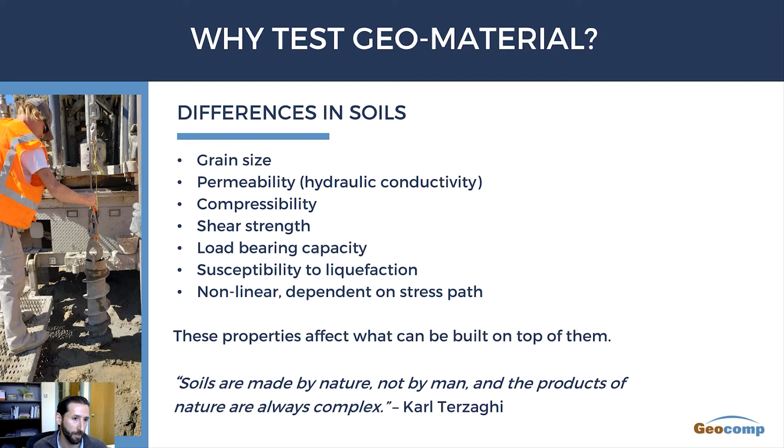I'm going to run through a few common examples here that you may be familiar with and what types of tests we deal with through some of these. But first is our first question - as I mentioned, we're going to quiz you a little throughout here.

What's one difference in soils that makes lab testing important? We just kind of ran through this. Is it shear strength? Is it the color? Or is it the soil location? Click your answers in there.

Give everybody a quick chance to vote. As I mentioned, we're trying to keep these easy and lighthearted - everybody gets a PDH.

Okay, so the right answer was shear strength, and it looks like pretty much everybody got that correct.

Okay, so the types of tests - I want to talk a little bit about these, and then we'll get into the application of them. We like to break this into about 4 general categories of testing: consolidation, strength, permeability, and cyclic and dynamic testing.

Consolidation testing has several variations - 1D incremental, constant rate, Rowe consolidation, or hydraulic consolidation. These tests are mainly performed for settlement analysis, and that comes into play with designing foundations, slabs, and many other types of structures. We're trying to get a sense of how the soils are going to settle - is it going to be differential? How do we have to design this structure to account for that?

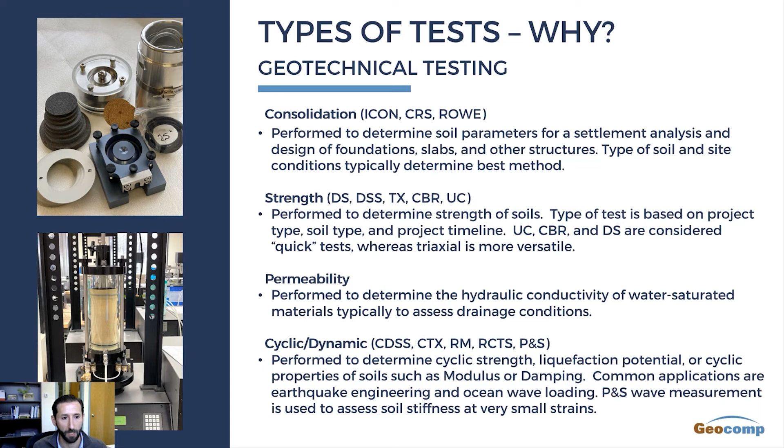So we'll take a look at a few examples here. First one being a deep excavation. Now this was a project in New York City, and it's kind of an example of this.

So testing needs to be done for a variety of reasons. It might be done for the temporary condition of the excavation - how many supports do we need to put in here? Maybe it's a water management plan during construction, and or possibly for the final condition when the structure is going to be built on top in the foundation.

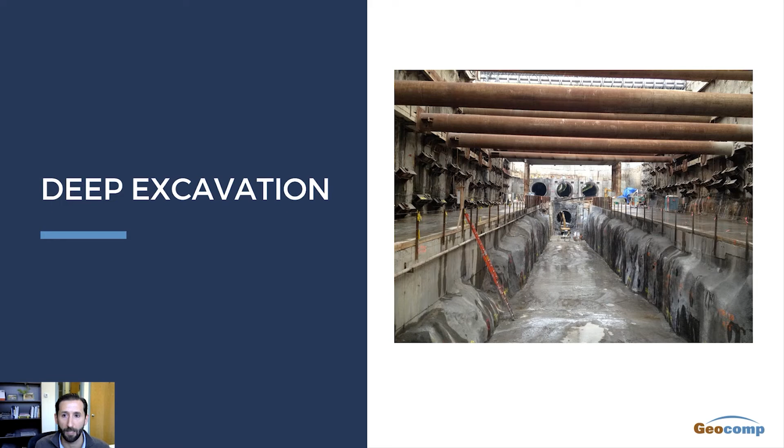So the soil here is going to be tested, probably for triaxial, direct shear, and consolidation. The types of triaxial you consider are mainly going to be for slope stability design throughout the excavation and construction. I'll draw on the next slide to give you a better sense of that, but that's going to allow them to design and get a design scheme based on these horizontal and vertical pressures that are going to be felt by the foundation. So this is key to get lab testing and see how things are going to behave.

But just considering the earthen dam in general, the properties of the soil need to be known so that the slope design, the angle, will support the pressure of the water, prevent harmful seepage. So internally, we need to make sure water's not seeping through the structure, and overall to prevent collapse or catastrophic failure.

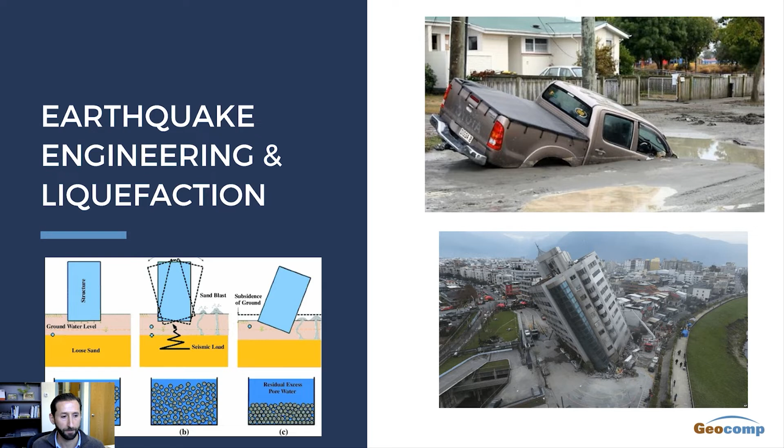Okay, that leads us into question 2.

So what is one popular soil strength test that has value for a variety of applications? A key here being soil strength test. As I mentioned those categories earlier - is it consolidation? Is it triaxial? Or is it dirt curls? I'll give you a hint: it is not dirt curls.

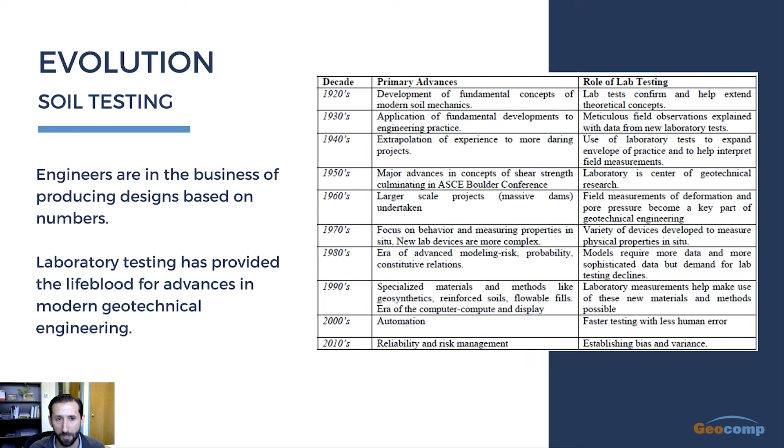Now I'm going to kick it over to Brian Thomas, who's got a great bit of experience working with both manual and automated testing systems. Thanks, Brian, for getting a little more in depth on why we need to perform the various geotechnical tests, and for that brief history lesson.

These tests would run over the span of many days and many nights, meaning that the lab technician would have to stay through the night in order to get the data that the test was producing.

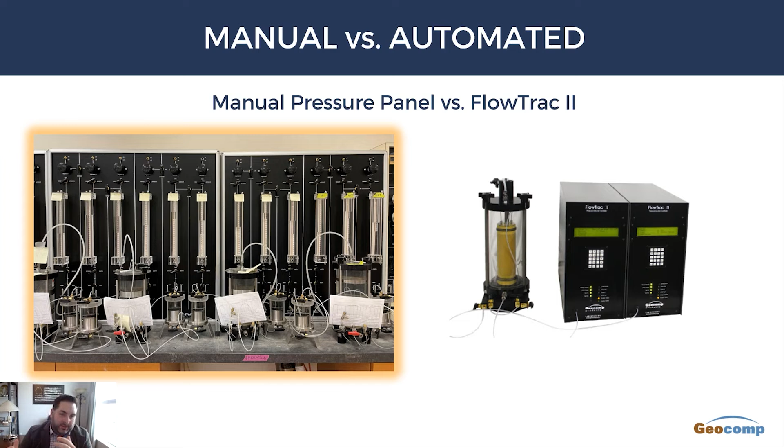If you missed one of your readings, you basically had to go back and guess. Many current and former lab techs remember setting alarm clocks and sleeping on cots in the lab. That was the dark ages, before the adaptation of automated testing. This is really one of the reasons why automated testing was invented to begin with—we can now improve the quality of testing while lessening the strain on our staff. With a fully automated system, there's no more sleeping on cots, no more all-night shifts.

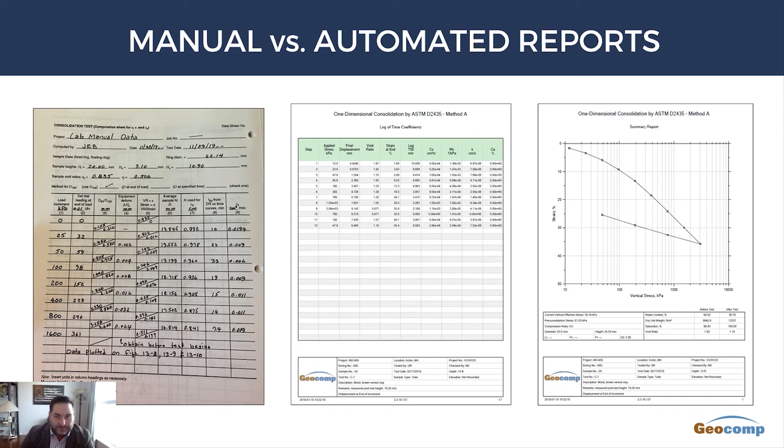We'll shift to the benefits of automation here. Automated geotechnical testing has made running tests and collecting data easier while being far more reliable. Most tests run from beginning to end with little to no interaction from the user, which frees them up for additional tasks in the lab.

Automated systems eliminate human errors. There's no mistakes in writing numbers down or doing calculations. Automated tests also offer increased and evenly distributed data points, creating consistent high quality results and far greater data volume available to assess.

An example of time savings: say we're testing silty clay using the old manual method. Typically that would take 16 to 18 days to complete. In contrast, a fully automated consolidation system will only take about a day or two to do the same exact test. Looking at the man hours that would take on the manual system, between logging and loading constantly, anywhere between 8 and 16 hours.

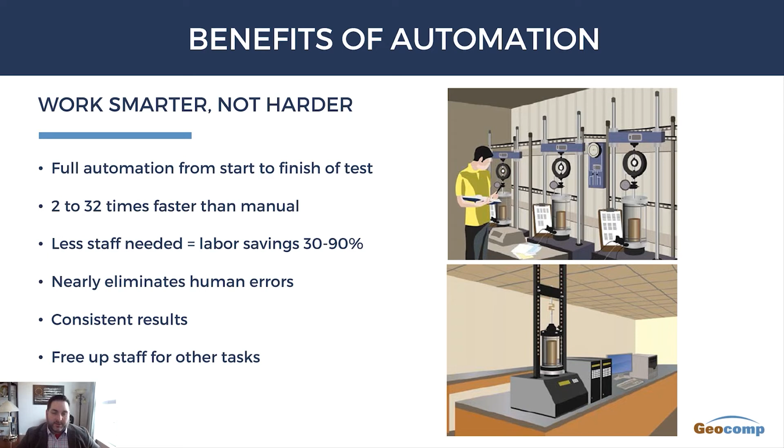With an automated system, you're going to cut that labor time down to just an hour. This reduction in labor allows you to perform additional tests and do other tasks around the lab, increasing your productivity.

Back to this image again. The consolidation systems: one automated system, as you see pictured on the right, can perform and replace up to 10 of the manual systems, as you see on the left.

So instead of placing the weight on the mechanical arm and waiting the full 24 hours, the automated system will place the load, 90% of that load, within 1 second, and it monitors the sample, compressing it until it has reached primary consolidation.

The end of the primary consolidation is when the excess pore water pressure has completely dissipated, meaning the pore water has been pushed out of the sample and the weight is resting just on the grains of soil. At that point, the test automatically advances to the next load, also called the next phase of stress, without having to wait the full 24 hours required by a manual setup.

Brian will go over in a couple slides with you a little more in depth about the time and labor savings.

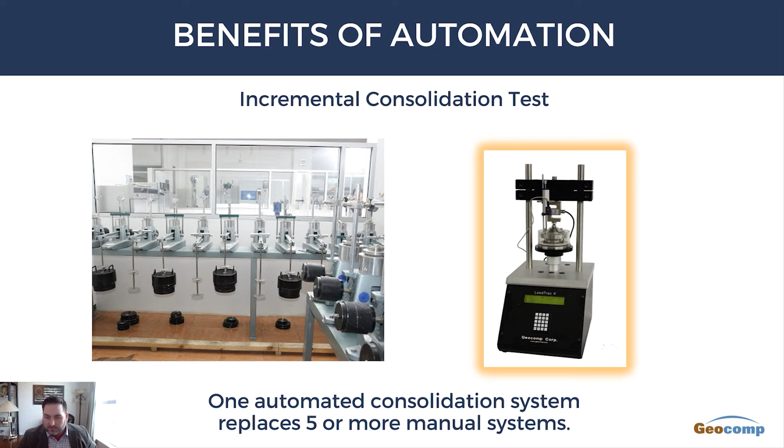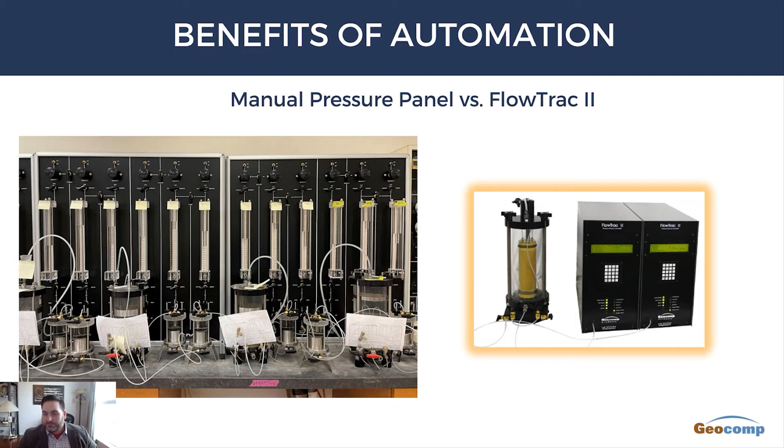Okay, so let's take a look at these numbers and time and labor savings a little deeper. This is pretty busy, so focus on these two columns. We've talked about why automated systems are better than manual, but this really puts the numbers on it. If you look at these columns, this is for three of the most common types of tests: consolidation, triaxial, direct shear.

These percentages are amazingly high. Compared to the old way of doing things, we're looking at 50 to 97% time savings, and pretty much the same in labor savings. These are huge, phenomenal numbers and differences you could have as an impact in your lab.

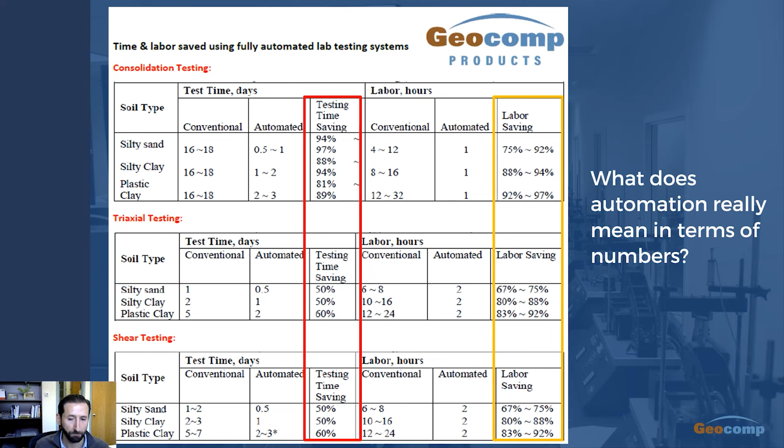Now, this is a pretty busy slide, I know, so let's tear it down and look at just consolidation. Let's look at these two columns again. As Brian mentioned earlier, a single automated consolidation system can replace upwards of 10, typically anywhere from 5 to 10, manual oedometers.

And that's really reflected in the numbers here. As Brian mentioned, manual testing takes 16 to 18 days or so, depending on the type of soils, since you're doing those loads every 24 hours. But with automated primary consolidation, we're looking at anywhere from a half day to a maximum of 3 days. This is phenomenal time savings.

So you can really take advantage and use that space properly in your lab. I want to bring out one of the most dangerous phrases in the language: we've always done it that way. The data really shows the impact automation can have. So why do you want to keep doing it the old way just because manual systems have been here and you've used them historically?

You can also think of this as using these savings to test more samples. In a shortened period of time, it could allow you to better capture spatial variability in the underground, removing some risk from your projects. There's all sorts of ways you can think about how to employ the time and labor savings here.

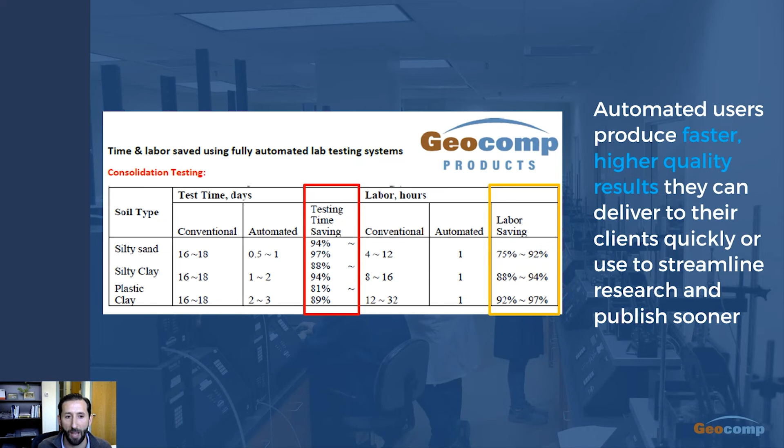But in the end, it's obvious that automated users are getting faster, higher quality results. They can deliver to clients more quickly, they can publish sooner, and these things you can really use to your advantage. Maybe that's taking the lead against your competition, producing results more quickly for local clients, or on the university side, allowing students, researchers, and professors to advance their learning or careers at a faster pace. These are big things to consider.

So let's take it more to the commercial side and look at the financial aspects of this - manual versus automated potential in terms of earnings. This covers some of the more common tests. Having the ability to run tests faster allows you to complete more annually. In most cases, it's 2, 3, over 9 times the number of tests you can get into. I want to focus attention on these two really common tests.

CBR and incremental consolidation - let's really take incremental consolidation since we've been talking a lot about that. We can see you can do about 9 times the number of tests annually. And look at what that means in dollars: all of a sudden we're going from $8,000 to making $75,000 in the same amount of time. So in terms of financial gain, there's a lot here as well.

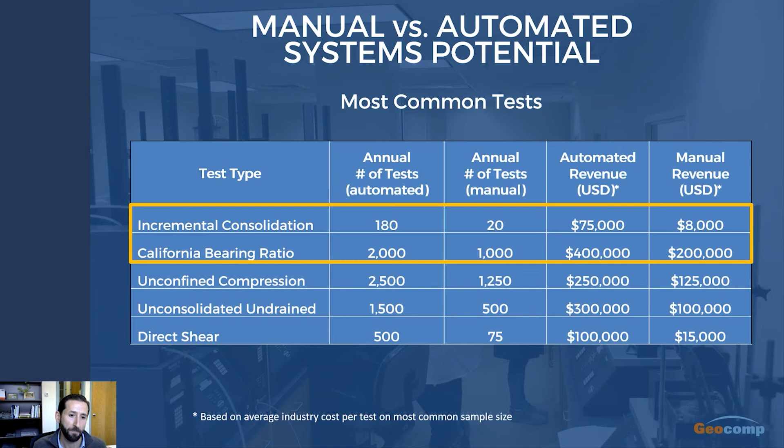Now let's shift from the common to, as Brian mentioned before, how these automated systems allow you to more easily bring on advanced tests in your lab. Although triaxial may not be a real advanced test, we have some other ones: cyclic testing, resilient modulus, simple shear, cyclic and dynamic testing. These all come into play when you get into automation. You can see in the manual columns here, not even applicable - you can't even run these tests with manual systems.

Sure, maybe in the research realm, universities can put together some systems and run them somewhat manually and digitally to get some data, but you're not doing that in a production sense. So let's key in on resilient modulus, because you can look at the numbers here - you can run 1,000 resilient modulus tests in a year, and that could be upwards of $400,000 in revenue, a potential financial gain for a lab.

I bring this one up in comparison to the last slide, the CBR - both tests have been used for roadway and transportation engineering designs, but resilient modulus has really come more into play in recent years. Historically, although it's been around, it was avoided mainly at the DOT level for many years because it was just too complex a test - the equipment was too complex, getting the data was too complex, and they weren't confident in the results. But now with the ease of automation and computer control, it eliminates all that complexity and can greatly boost confidence. So we've seen DOTs really start latching on to using resilient modulus for designs and project requirements, even all the way up to the Federal Highway Administration level.

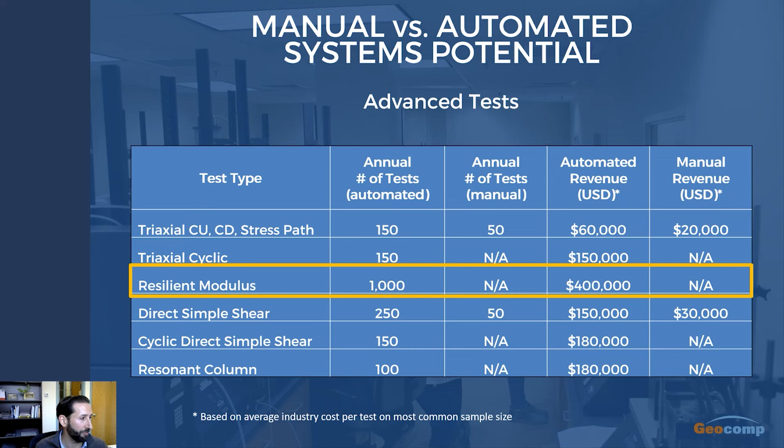So if you're a commercial lab, you really should think about what's going on in your state. We're seeing a lot of states moving to resilient modulus testing as the core test. This might be the time to bring this type of testing to your lab and consider automation. You might want to be the first to capture the market in your region with this type of testing—certainly you don't want to be the last. There's definitely a lot of financial gain to consider here in terms of automation.

That brings us to our third question. I like to put this out there in terms of the three P's of automation: productivity, precision, profitability. So which of these is a key benefit? Is it nearly eliminating the human error aspect of logging data manually and entering it into a computer afterwards, getting faster and more consistent, reliable results, or having staff handle more tasks while the computer does the work? Or is it all the above?

You might have noticed we were a little tricky with this one—it's all of the above. This is really what automation brings to your lab.

Now I want to give you a visual perspective. I'm going to run this video, talk through it once, and then run it again. This is a fully automated lab at Geotesting Express. There are almost 200 automated testing units in operation in this lab.

Now I'm going to run this through again, and I want you to look in this video and see how many people are logging data or trying to control these systems. One—oh, there's two. Maybe a third. So two to three people, and there are 200 units running in here. There's pretty much nobody in here and these machines are running, collecting data. 75% of the systems in this lab, at any given time, are actively running tests without needing to be constantly monitored—changing valves, changing loads, logging the data. They're doing it all for them.

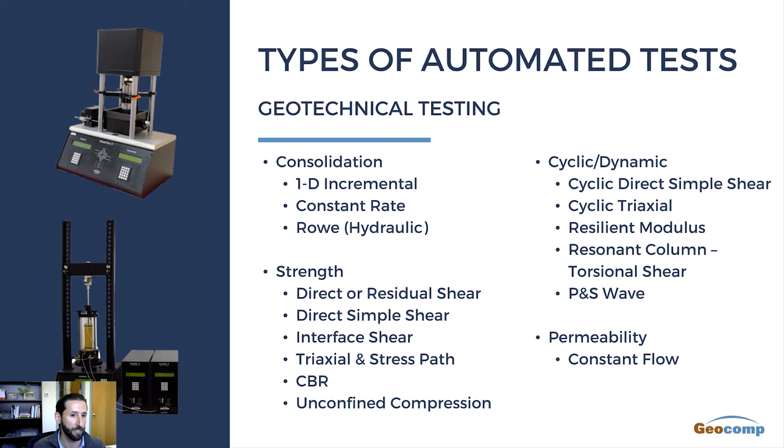Let me break this down a bit more and give you a sense of the other aspects of automation—this is generally the case for most automated systems, but maybe not all.

Take the unit on the left, an automated direct shear—the nice part is it's not just a direct shear. With manual units, like the weights Brian showed earlier with the consolidation units, they are what they are: you get consolidation, you get a direct shear result, and that's really it. But when you move into the automated world with these types of systems, you can perform multiple tests on a single unit. So a unit you might have purchased for direct shear can stay busy running all these other tests, like the common 1D incremental consolidation.

Maybe you want to use it when you get a project that requires a direct simple shear. In the end, this investment may have a higher initial cost, but this equipment can stay busy running any type of test, any time of day.

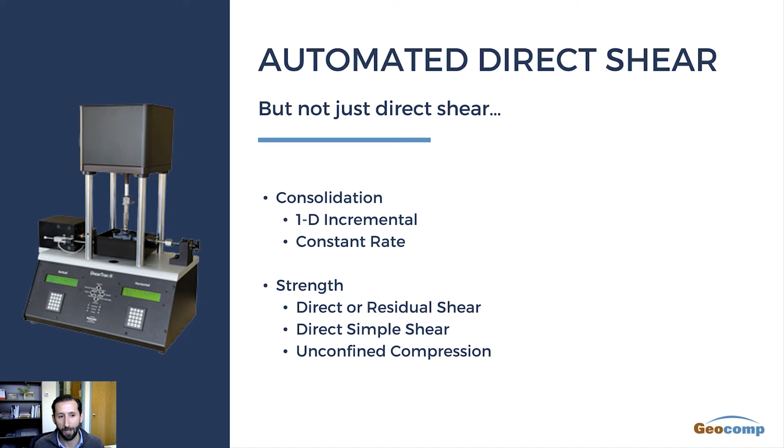So it's really such a versatile unit as you get into automation. You take it up to the triaxial level, not just a triaxial. You've got a load frame and a couple automated pumps like Brian talked about earlier. You can run all of these tests with a single unit. This is one machine. So think about the scalability in your lab, the space savings, and being able to put other tests in your lab. All of these can be run on one unit right here. I hope that really puts it in perspective, what you can do with automated units.

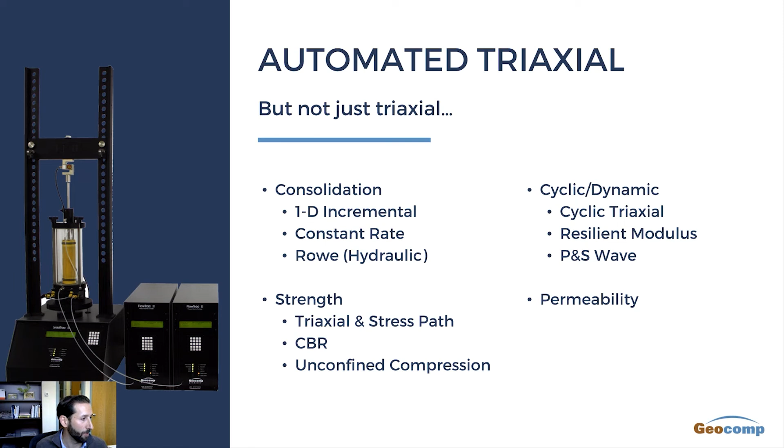So these are some of the core features I'll bring up, and I won't spend too much time on this, but these are some nice things about automated systems. You have the computer-controlled aspect as well as being able to control it manually on the system, for initial test setup or whatever you want to do there. If you're in a teaching lab and still appreciate the manual style, wanting your students to log data by hand as an important learning process, you can still do that with these automated systems. You're not losing out on those aspects of manual test and control.

Integrated control and data acquisition boards give you analog channels for your load cells and LVDTs, but you can also step it up to digital channels like linear optical encoders, where if you're getting into the research realm and want really precise measurements, you can start using these with automated systems. Not every type of automated system is going to have these, but many do, and that's the high precision electromechanical setups. Brian will talk a little about why that's so great.

We've got safety mechanisms on units that prevent damage, over-travel, and safety protections on your sensors, plus network connectivity and remote monitoring—Brian will comment more on that. Everything's connected through the network, so you can take advantage of connecting remotely. And you can easily calibrate your units right through software, so you don't have to bring in a third-party contractor who only knows how to work with their own equipment. You can start doing a lot of this yourself.

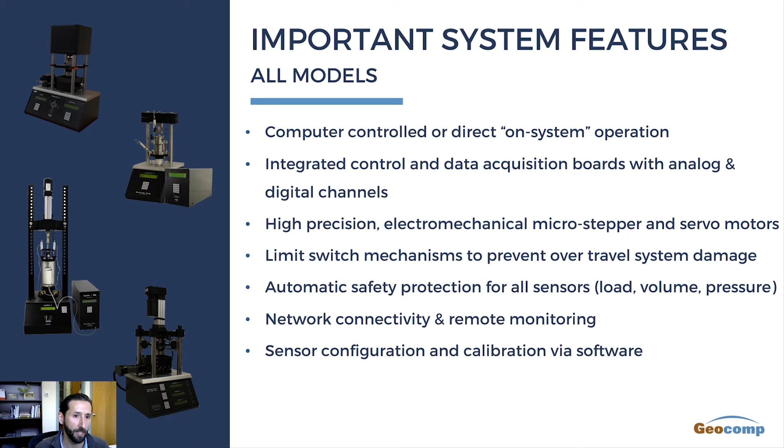All right, I'll pass it back over to Brian here, and he's going to dive into why automation might be right for you in your lab.

Hello again. So yes, exactly—why should you consider either upgrading or adding to your automated lab? Well, using an automated testing system allows for quick and repeatable test setup. Technicians can watch the test in real time and make changes as necessary. You can remotely operate and monitor the test, and you can even take the electronic results and email them off as well. It allows you to modernize with a digital management system—no more paper documents, no more losing that report, no more misplacing it.

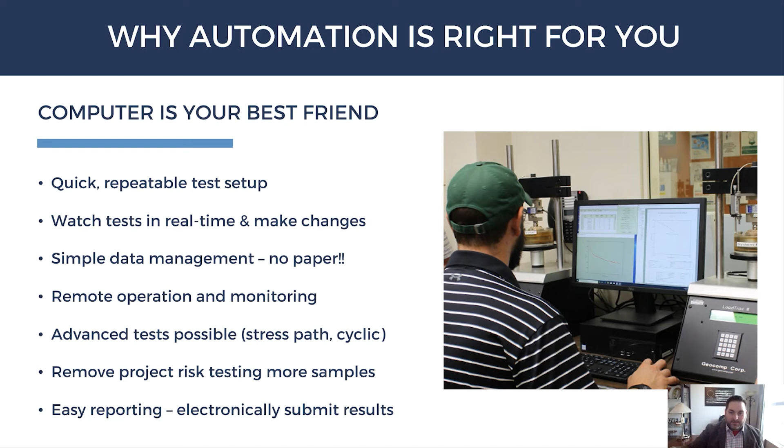Say you're given a deadline and you only have a couple of manual tests available—remember that silty clay and silty sand took 16 to 18 days to get a result back. If you've only got 2 or 3 tests available, you're only going to be able to perform 2 or 3 tests. With an automated system, you're going to be able to get a greater capacity of tests in, cutting them down to about a day each. In that same couple-week period, you can get upwards of 14 tests done, whereas you could get only 2 or 3 with manual systems sitting around. So you're further reducing risk on your project by getting more tests in when you're limited by time.

Automated electromechanical test systems have additional benefits. They require little to no maintenance during their lifetime. They're environmentally friendly, self-contained, and compact. It gives you an improved image to your clientele. So if you're a commercial lab, for example, that's going to equate to return business and referral business. And it's going to allow you to retain your staff with more interesting work on the modern equipment.

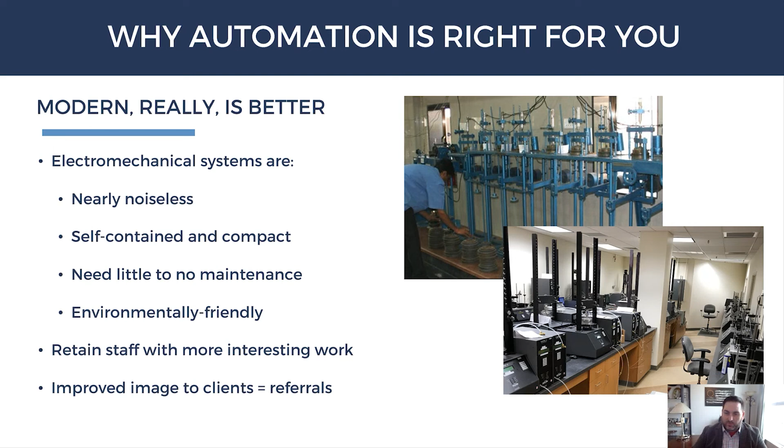For commercial labs, systems are operational 24/7. They are programmed to automatically move to the next phase, meaning results will get out faster, all while needing less interaction from the staff to make any kind of adjustments or advance the stages as you would on a manual. These machines will run when the lab is not staffed, such as weekends and holidays, and they don't call out sick and they don't take vacations either.

For many tests, a single automated system can replace up to 10 manual units, so you maximize the use of your lab space while offering more test types for your clients with speedier results as well.

The software produces complete reports with plots and tabular data. That data can be immediately reviewed, and with just a quick click of a button, you'll get a clean and professional report to send to your client. The programming significantly reduces the need for manual data entry, and again, it speeds up that reporting process time.

For agency labs, it'll increase the quality control, which is vital to most state and federal agency labs. Most of these agency labs have limited or variable annual budgets, and it makes it tough to staff these labs. With less staff and less budget, it's crucial that the equipment will continue to perform for many years down the road and avoid project delays. Automated equipment will allow a smaller lab to support a variety of ongoing projects.